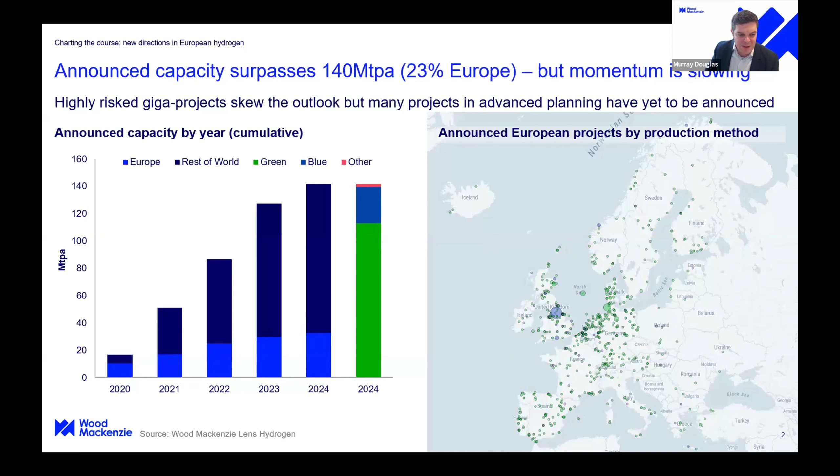What's really been catching the headlines this year is the number of project cancellations we're seeing. I think to some extent there's not a huge surprise here that we are seeing projects cancelled. We saw a lot of early announcements coming through, so there was always an expectation that we'd begin to see some attrition from that.

Obviously, what's more worrying is that some of those particular projects that have been cancelled—the classic example is the Ørsted FlagshipONE project, which had taken a final investment decision and was subsequently cancelled for a variety of reasons, but we think principally because they had not secured an off-taker.

And we're beginning to see more project cancellations come through. We think we'll continue to see that next year. Again, maybe a more bearish sentiment for European markets is that of the 2.5 million tons per annum globally that we've seen cancelled, almost half of that has come out of the European market. So we are seeing clear evidence of projects struggling in the European market, and it's down to a number of different reasons.

Some of those are as simple as portfolio streamlining within companies, where they announced a range of projects and they're simply narrowing down and focusing on the strongest opportunities. This is natural and evident across most parts of the energy value chain as well—it's not a particular problem for hydrogen.

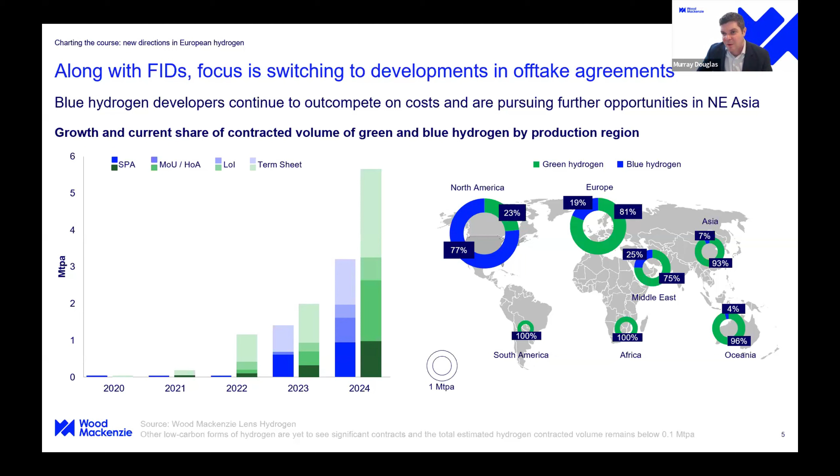But I think also when we look at this on a regional basis on the right-hand side, we see some quite interesting trends where we have generally a heavier weighting towards green electrolytic hydrogen within most markets, with the exception of North America. And actually, one of the things that we're expecting, particularly under the new Trump administration, is we'll probably see that share of blue offtake agreements out of the North American markets continue to build and even maybe grow further over the next few years.

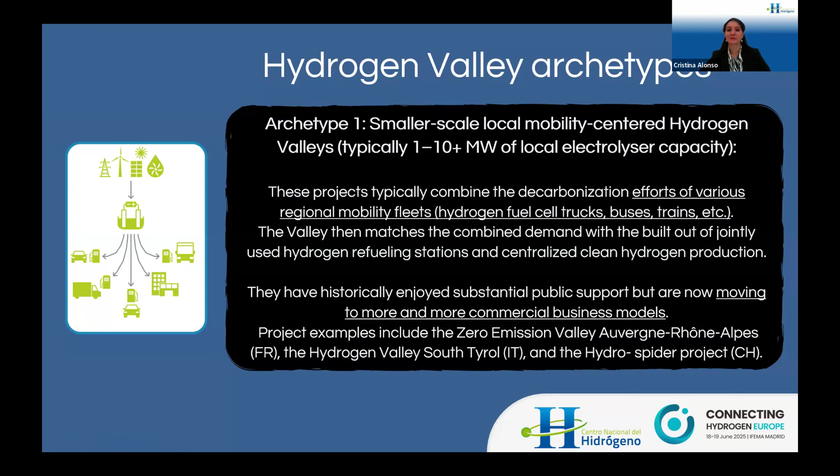So the first archetype is the small scale, local mobility centered hydrogen valleys, typically from 1 up to 10 megawatts of local electrolysis capacity. This project typically combines the decarbonization effort of various regional mobility fleets. The valley then matches the combined demand with the build out of jointly used hydrogen refueling stations and centralized clean hydrogen production. These have historically enjoyed substantial public support, but are now moving more and more to commercial business models.

Archetype 2 is the medium-scale hydrogen valley focusing on industrial decarbonization, typically from 10 to 300 megawatts of local electrolysis capacity. These valleys are based on a local or regional hydrogen production source, usually clean hydrogen, directly at the site of one or more large industrial consumers serving as anchor load, such as refineries or fertilizer production plants. The key to success for such projects is a seamless integration of the hydrogen production into the established production processes of the anchor off-taker. This type of hydrogen valley continues to grow in numbers and production sizes.

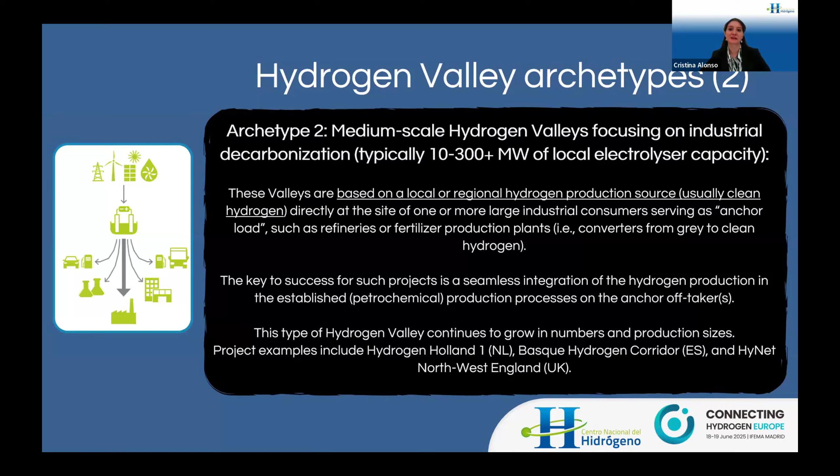Archetype 3 is the large-scale and ultimately export-oriented hydrogen valley, typically 250 up to 1,000 megawatts of local electrolysis capacity. This type of valley is characterized by focusing on low-cost production of clean hydrogen for local offtake, but ultimately mainly regional and international export to connect supply and demand centers on a global scale.

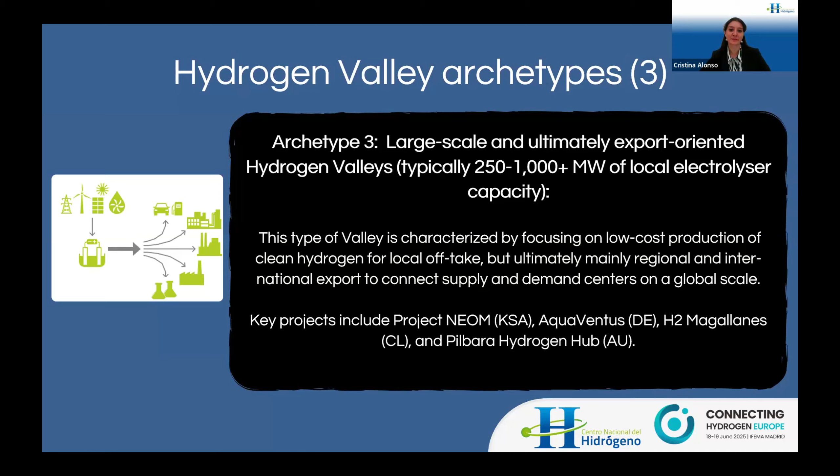According to the European Commission, the hydrogen valleys division is the large-scale hydrogen valleys, more than 4,000 tons per year of hydrogen produced and used, and the small-scale valleys, more than 500 tons per year of hydrogen produced and used.

Recent cost increases and limited commitments so far for potential off-taking reduce the speed. Spain's ambition of 11 gigawatts of installed electrolysis capacity by 2030 could translate into the annual production of around 1.1 megatons of green hydrogen, requiring a total investment of about 20,000 million euros for electrolysis alone, with additional investment required for renewable energy.

Green hydrogen could be produced for 4 to 5.5 euros per kilo in Spain by 2030, around 10 to 20% below the projected production costs in Central Europe, thanks to power purchase agreement markets, the lower cost of electricity, which is key to cost-competitive hydrogen production, as well as a well-established industrial and transport footprint with the potential to drive new hydrogen and synthetic fuel demands.

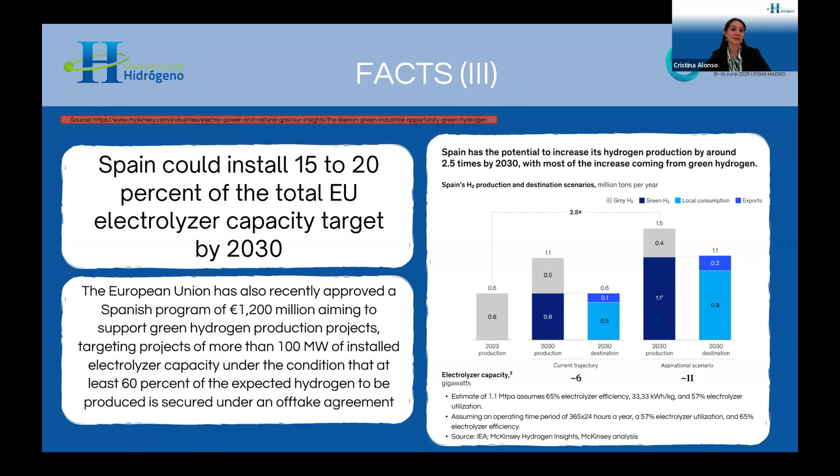Spain, together with Portugal, is the fifth largest emitter of biogenic CO2 in the European Union. Spain has the potential to retrofit its existing network of gas pipelines for the transportation of green hydrogen, both for domestic consumption and for export. Spain enjoys an advantageous geographical position relative to maritime trading routes, and could install 15 to 20% of the total European electrolysis capacity target by 2030.

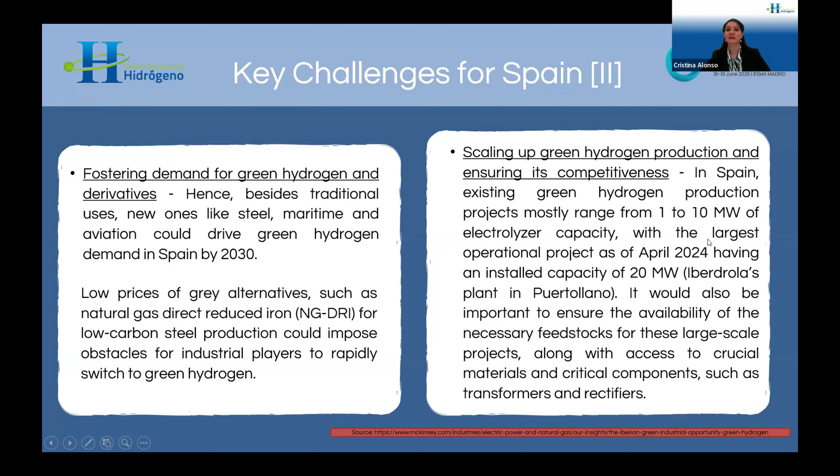Some key challenges for Spain: the European Union and Spain must continue to ensure that regulatory demand for green hydrogen is met, financing first-of-a-kind green hydrogen projects and making them bankable, deploying and optimizing the infrastructure to develop green hydrogen production, transport and storage, fostering demand of green hydrogen and derivatives, scaling up green hydrogen production, and ensuring its competitiveness. Spain produced approximately 0.80 million tons of hydrogen in 2022, representing around 10% of the European Union's total production.

Most of Spain's current hydrogen production is grey hydrogen. However, efforts are underway to expand green hydrogen production through renewable energy projects. The Spanish government launched a support scheme for hydrogen valleys, 1.2 billion euros to support industrial-scale projects based on a set of criteria, including prior commitment from customers to purchase 60% of hydrogen production.

Hydrogen must be renewable as per European guidelines. For electrolysis, capacity must be more than 100 megawatts, with an exception for grouping of projects with at least 50 megawatts electrolysis capacity. Several production projects utilizing a cluster approach are already underway in Spain, such as Fertiberia's renewable hydrogen, ammonia and fertilizer production project here in Puertollano.

Now let's make a quick tour through some of the hydrogen valleys in Spain. The Basque Hydrogen Corridor, led by developer Petronor, has the objective of creating a hydrogen ecosystem in the Basque Country which allows progress in the decarbonization of energy, mobility, different industrial sectors, as well as services sectors, and is based on specific projects and actions building on a strategy of public-private collaboration. In addition, the Basque Hydrogen Corridor aims to be a key enabler of sustainable development of the hydrogen energy value chain in the region. The value chain coverage includes hydrogen production route, hydrogen end uses, hydrogen storage conversion, hydrogen transport and distribution.

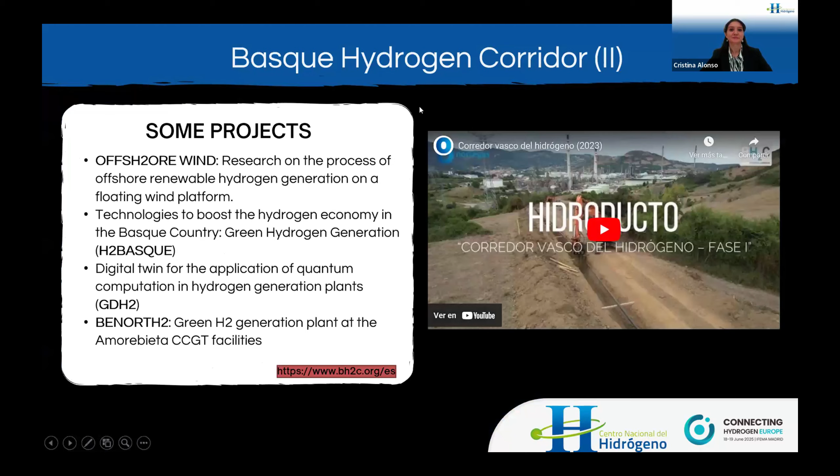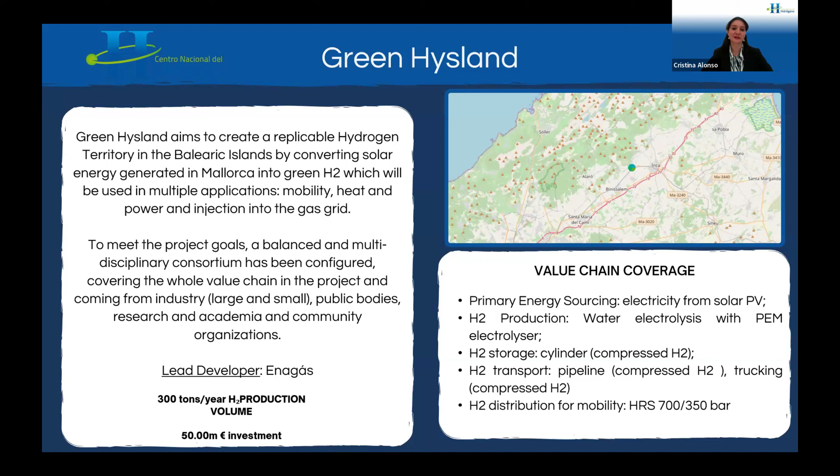Green Hysland aims to create a replicable hydrogen territory in the Balearic Islands by converting solar energy generated in Mallorca into green hydrogen, which will be used in multiple applications: mobility, heat and power, and injection into the gas grid. To meet the project goals and balance, a multidisciplinary consortium has been configured, covering the whole value chain in the project, coming from industry, large and small public bodies, research and academy, and community organizations. The lead developer is Enagás, and the value chain covers primary energy sourcing, hydrogen production, hydrogen storage, hydrogen transport, hydrogen distribution for mobility.

Moeve's project, Andalusian Green Hydrogen Valley, will install 2 GW of electrolysis capacity in Huelva. The Onuba project is an agreement with Fertiberia to produce 400 MW of renewable hydrogen and ammonia with a direct power supply agreement, and an agreement with C2X to produce 200 MW of renewable hydrogen and renewable methanol. In Algeciras, they will produce renewable hydrogen with EDP and renewable ammonia with Yara to decarbonize industries and the maritime sector, also in Central Europe.

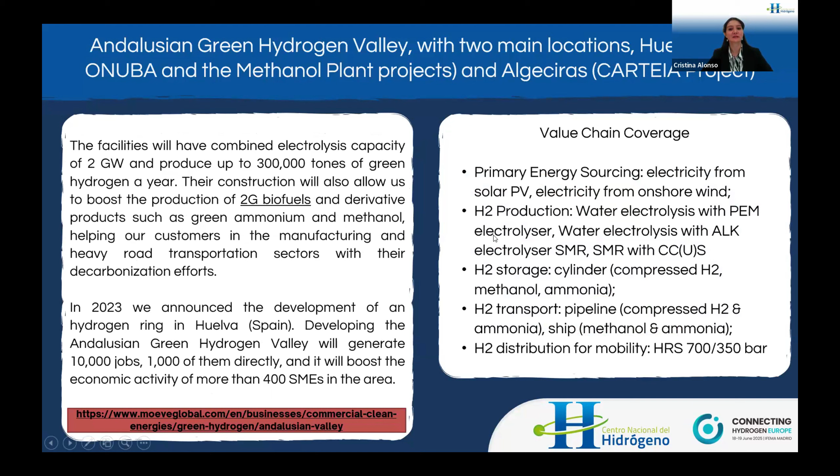The value chain covers primary energy sources, hydrogen production, hydrogen storage, hydrogen transport, hydrogen distribution for mobility. The Valencian Hydrogen Cluster, HyVal, is an initiative led by BP, created with the aim of promoting and favoring the development of the renewable hydrogen economy in the Valencian community and contributing to the region's energy transition through public-private collaboration. HyVal includes large-scale green hydrogen production at BP's Castellón refinery of up to 2 GW of electrolysis capacity by 2030 in two phases.

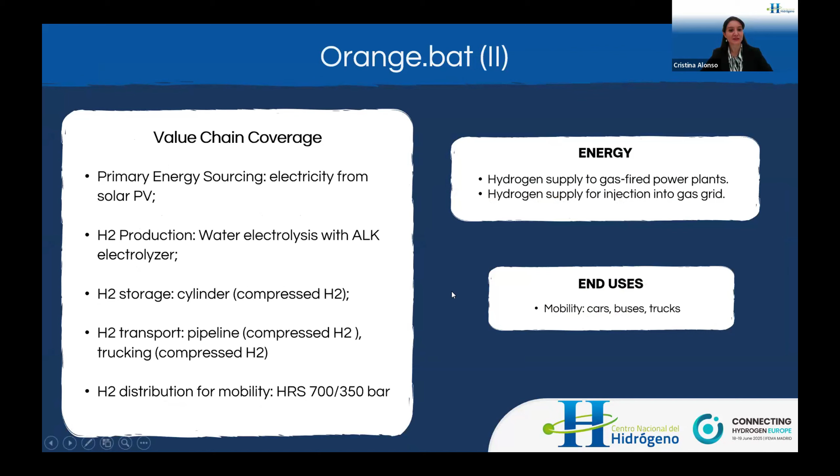Orange Bat consists of an electrolysis plant of 100 MW to produce green hydrogen in the municipality of Onda, Valencia, under hydrogen purchase agreements to industrial off-takers, the ceramic cluster, and for mobility. The hydrogen will be distributed through a new hydrogen grid. The green electricity required will be provided by PPAs from renewable energy plants. They partner with leading technology players in the hydrogen industry and other European Union equipment suppliers. The lead developer is Smart Energy. The value chain covers primary energy sourcing, hydrogen production, hydrogen storage, hydrogen transportation, and hydrogen distribution for mobility.

To conclude, I would like to highlight that the European Union continues to support hydrogen production through the first European-wide renewable hydrogen auction signs grant agreements, with 6 new projects, 2 of them here in Spain, Hysencia and Catalina, where CNH2 will participate. Thank you very much for your attention.

Thank you for sharing your important information with us, Cristina. I have also gathered some questions for you. The first one is, how is Spain Hydrogen Valley planning to drive the commercialization of hydrogen? And what specific end users or applications are being prioritized for adoption?

Spain is leveraging its hydrogen valleys, including key projects like those in Aragon, Castilla-La Mancha, and Catalonia, to drive the commercialization of green hydrogen. These initiatives are part of the European push to develop hydrogen technologies under the European Hydrogen Strategy, which aims to achieve climate neutrality by 2050. Spain's approach focuses on several key strategies: industries and applications, priority end users, and hydrogen valleys as pilots.

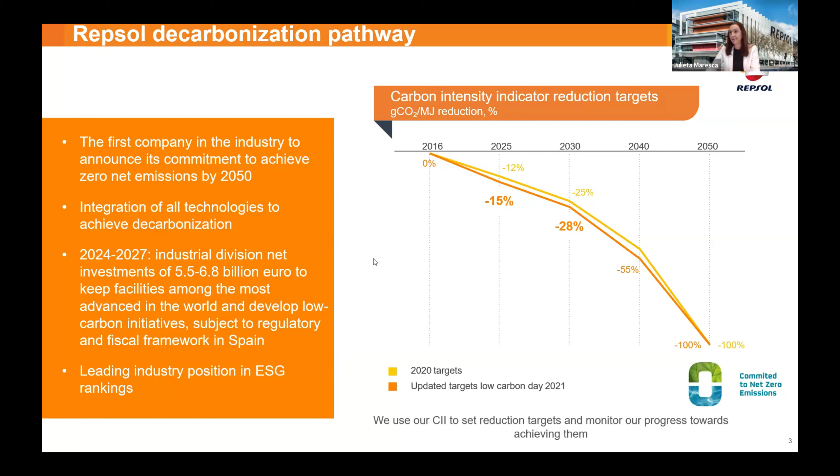Repsol produces energy from different sources, including hydrocarbon and renewable energy such as wind, floating wind, solar, and hydroelectric, and transforms it into products and services for our customers. Repsol has 4 main business lines that enable it to move forward in the energy transition: upstream, industrial, customers, and low carbon generation.

I want to share with you some big numbers regarding our footprint and capability. Our industrial operations are robust, and we have implemented over 650 digital transformation initiatives and established the Repsol Tech Lab, which boasts over 200 research alliances worldwide. Repsol is also a leader in renewable energy, with around 3 gigawatts of low carbon generation capacity in Spain, the USA, Chile, Italy, and Portugal.

Going back to the industrial area, we are transforming our industrial facilities into multi-energy hubs, capable of turning a wide variety of raw material and waste into products with a low carbon footprint, such as 100% renewable fuels. Where do we do it? In our 7 industrial complexes, 6 on the Iberia Peninsula and 1 in Peru. The company is proud to have one of Europe's most efficient refining systems, capable of processing over 1 million barrels of crude per day.

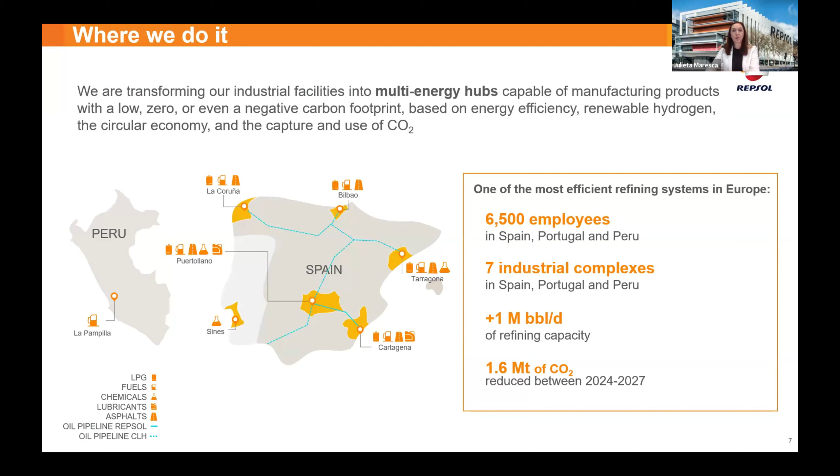Our industrial strategic line 24 to 27 aims to increase the profitability and create hubs for renewable fuels. We will advance in turning our industrial complexes into low carbon platforms, becoming leaders in renewable fuels in Iberia, and explore opportunities to grow our renewable fuel businesses in more attractive markets like the USA.

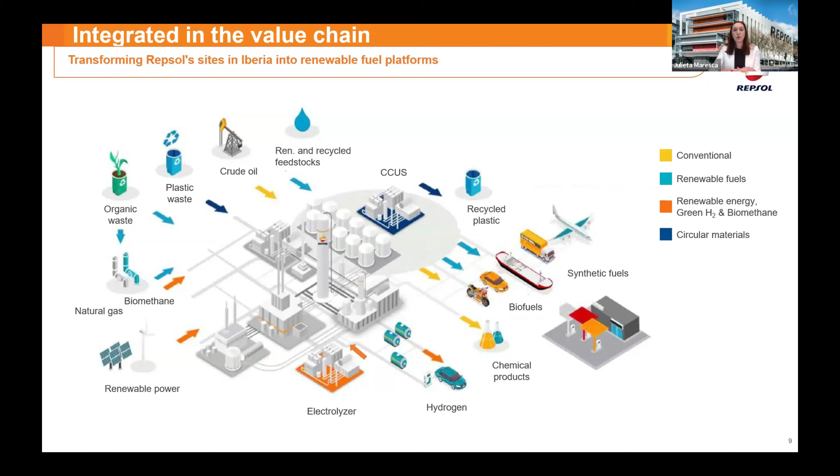We are transforming our legacy sites. In the value chain, we have made conventional and renewable fuels and biomethane from organics and plastic waste, feedstock, circular material, and now we are incorporating also renewable hydrogen.

I want to highlight Repsol's commitment to innovation and technology throughout our Repsol Deep Tech Fund. This fund is endowed with 50 million euros for investment in startups, and we have already invested in 20 startups with disruptive technologies. We have over 230 experts working in various fields such as advanced mobility, bioenergy, advanced mathematics, geophysics, low emission, and of course, renewable hydrogen.

Our Repsol Technology Lab is a hub of innovation. Repsol has a strong ambition to remain leader in hydrogen in the Iberia Peninsula. Our goal aligns with the goals stated in REPowerEU, which plans to produce 10 million tons of renewable hydrogen and import another 10 million tons within the EU by 2030.

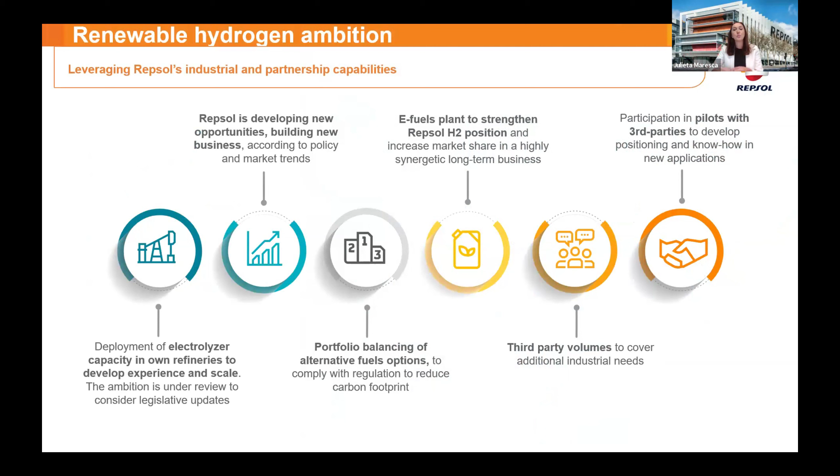Our renewable hydrogen is a fundamental lever in our decarbonization strategy. We are planning to install electrolyzer capacity in our refineries to gain practical experience and achieve scalability, and aim to leverage Repsol's industrial experience and partnership capabilities to maximize our strengths.

Repsol will leverage its own platform as the first hydrogen producer and consumer in Spain, and its presence along the value chain: renewable generation, hydrogen production, and commercialization. Our plan is not restricted to our own consumption, it needs to include growing our leadership in hydrogen production to meet the demand of other clients, such as industrial consumers like fertilizers, steel, and chemicals in clusters near our industrial sites, which we will reach with short-distance logistics.

Heat uses, initially blending hydrogen with natural gas in the Spanish natural gas network, and serving emerging needs of hydrogen and e-fuel in transport.

Our vision for hydrogen deployment is both strategic and feasible. We are aiming to install up to 0.7 gigawatts of hydrogen capacity by 2027 and up to 2.4 gigawatts by 2030, including our international position and renewable hydrogen generation from biomethane. Targets and capex could be adapted according to opportunities driven by regulation and market development.

Here you can see the Repsol Hydrogen Hub development in phase 1 until 2027. There are ongoing big projects across Iberia with a multi-production technology approach. Some of them, for example, Tarragona 150 megawatts, Cartagena, Bilbao, the big ones of 100 megawatts, Puertollano and La Coruña 30 megawatts, and in Sines, Portugal, we have a project with 4 megawatts of electrolyzer. For all these projects, we are planning operations in 2025, 2026, and 2027, depending on the regulation and tax scenario.

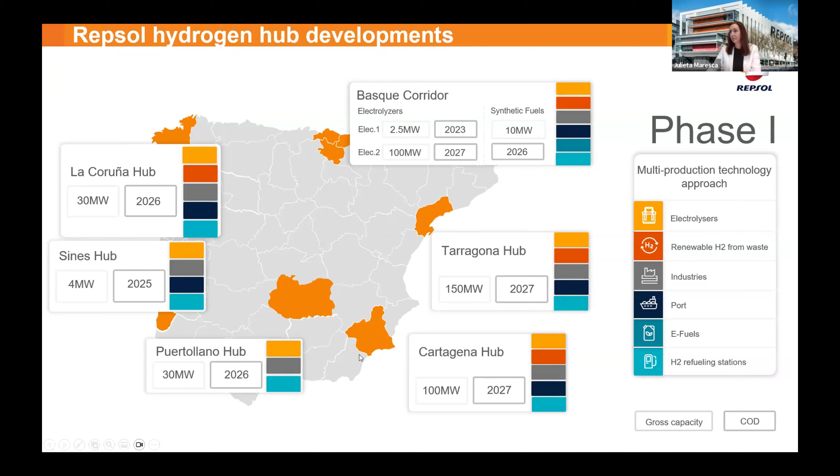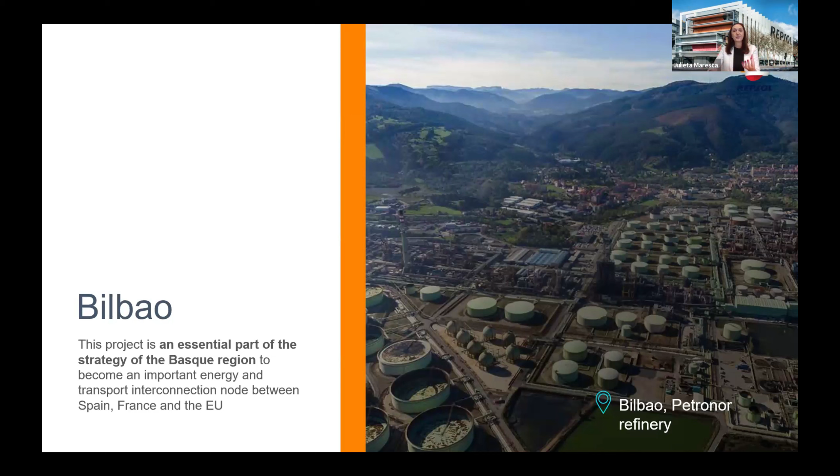Here you can see the Repsol Hydrogen Hub development in phase 1, in Bilbao. Here are some cases I want to show you. The Bilbao project is a key part of the Basque region strategy to become a significant energy and transport connection hub between Spain, France, and the European Union.

In this site, we have 3 electrolyzers. The first of 2.5 megawatts is in operation from last year with an annual production capacity of 350 tons annually of renewable hydrogen for industrial and mobility uses. The second one of 10 megawatts, with our partner Saudi Aramco, will produce hydrogen for the refinery and for an e-fuel plant, which will also use captured CO2.

And the biggest, 100 megawatts, to use the product not only for the refinery, but also for injection into the natural gas network. Its planned operation is in 2027, and this project has been identified by the European Commission as a project of common European interest.

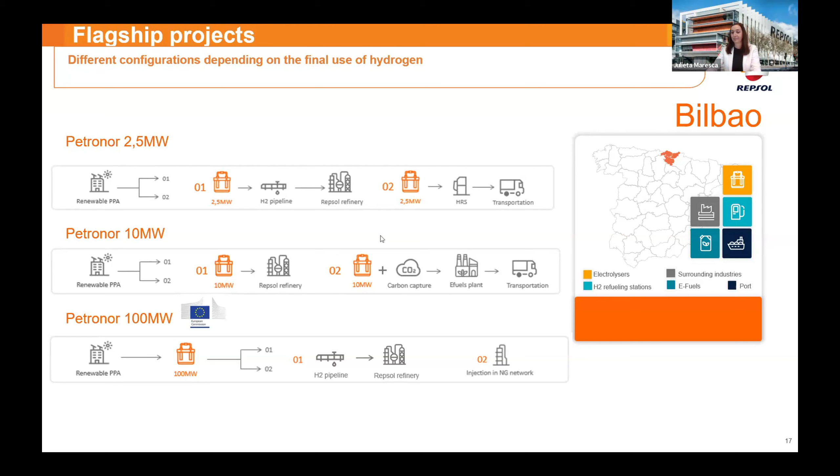We aim to produce renewable hydrogen and oxygen in the Cartagena refinery in the Escombrera Valley. We are at the front-end engineering design stage, and the FID should be in 2025, next year. Like the Petronor project, this project is also identified by the European Commission as a project of common European interest.

As Cristina said before, it's also important to mention that Repsol leads and promotes hydrogen valleys in Spain, such as the Basque Hydrogen Corridor, the Hydrogen Valley of Catalonia, and the Hydrogen Valley of the region of Murcia, among others, in line with the future hydrogen backbone network.

It also participates as a promoter company in the collaborative alliance SHYNE, Spanish Hydrogen Network, created in 2022, with the mission of promoting renewable hydrogen and maximizing the entire value chain. This association has a collaborative network made up of 7 promoter companies and more than 20 collaborators.

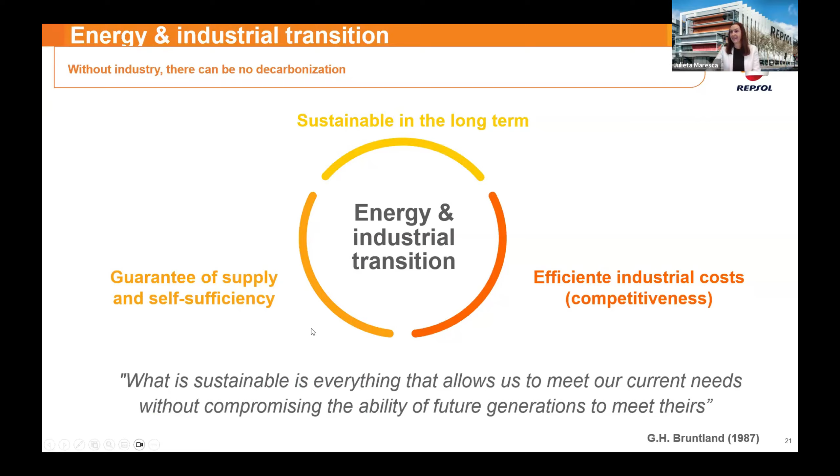To conclude, Repsol remains optimistic. The company is confident in its current renewable hydrogen portfolio, which enables it to capitalize on its diverse efforts in the unique condition of the Iberia Peninsula in terms of renewable resources and industrial synergies. The advancement of the European and Iberia Hydrogen Initiative can build upon Repsol's existing flagship projects, lowering barriers for new investments both in the peninsula and internationally.

Thank you for sharing. Thank you so much, Julieta. I've also got some interesting questions for you.

So the first one is, in your view, what are the primary challenges or barriers to scaling hydrogen adoption in the coming years? And what strategies might address these concerns effectively?

There are many challenges to expanding the use of hydrogen in the coming years regarding technology, regulation, and infrastructure, among others. But I would like to highlight three in particular. The primary concern is the high LCOH, the levelized cost of hydrogen production, influenced by the capex of electrolyzers and electricity prices, making economic viability without subsidy difficult at present. Funding from European and national sources is essential for market creation. In the case of hydrogen in particular, electrolysis technology has been known for decades, but has not yet been operated for long periods at the scale at which 100 megawatt plants are now being planned.

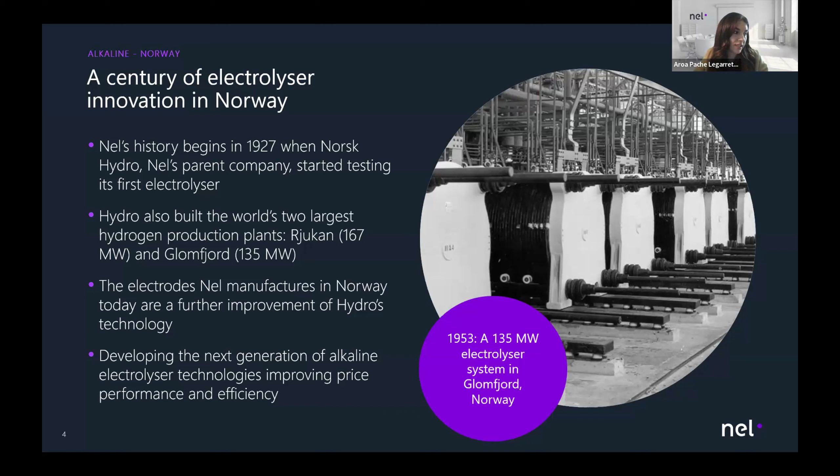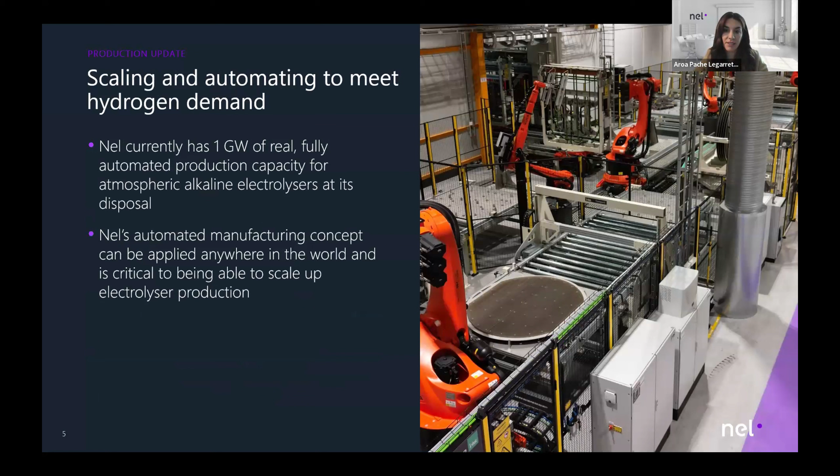The electrode manufacturer facility is in Heroya, Norway, and it has a current 1 gigawatt annual capacity, and it's fully automated, as you can see in the picture.

And then in the US, in Wallingford, Connecticut, we have another technology that has been developing and selling for 27 years now. This one started with Proton OnSite, that originally utilized PEM technology to produce oxygen for submarine life support. Now, over the last years, in collaboration with General Motors, we are developing the next generation PEM technology, which will improve price, performance and efficiency.

Indeed, last month we had the grand opening in Wallingford, Connecticut, and now the production capacity is 500 megawatts, mostly automated.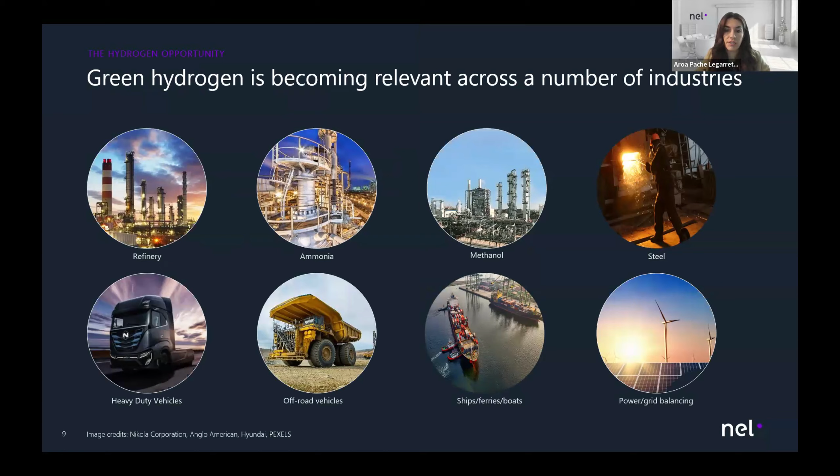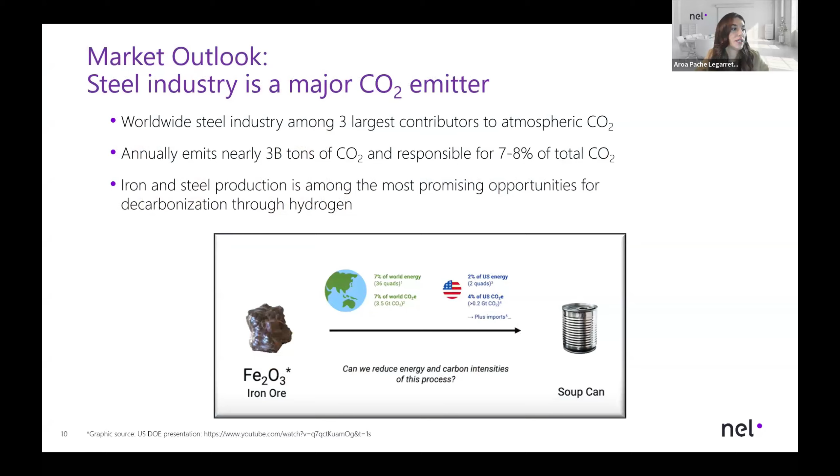So in the next one, just as an example, we have steel. Globally, the steel industry is among the 3 largest contributors to CO2, responsible for 7 to 8 percent of the total emissions. So imagine how huge an opportunity for green hydrogen this is.

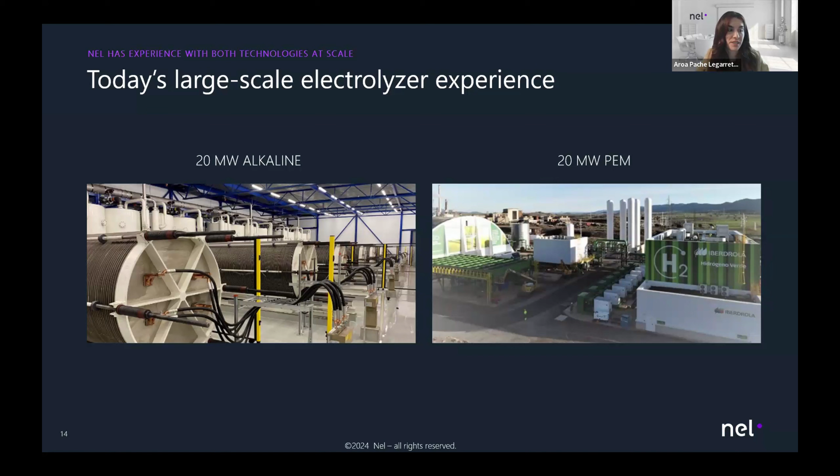For mobility applications, we have installed a number of packaged PEM electrolyzer plants, as the one that you see in the picture. This is a fully integrated solution that sizes very well for a lot of car, truck, bus fueling applications. This is just an example located in Switzerland, of 2.5 megawatt nominal power and about 1.1 metric tons per day.

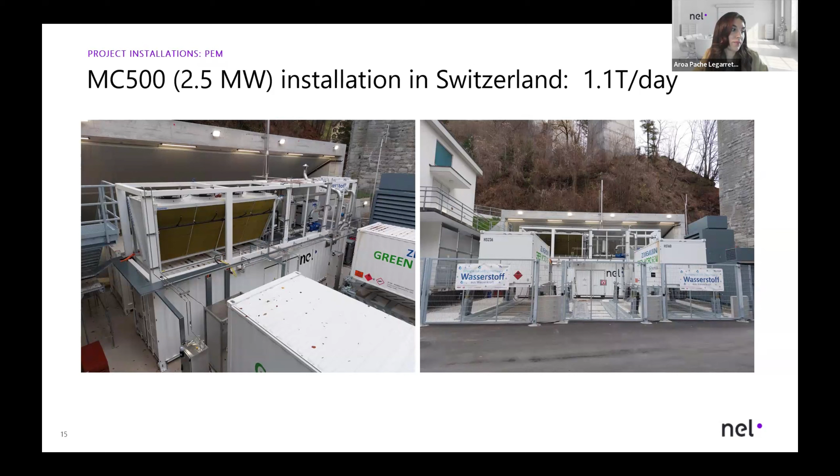We move to another example that is the famous one and the one mentioned before. It's the largest PEM electrolyzer installation installed to date, which produces 8.5 metric tons per day of hydrogen output. This is used for green ammonia production at the Fertiberia plant in Puertollano, Spain.

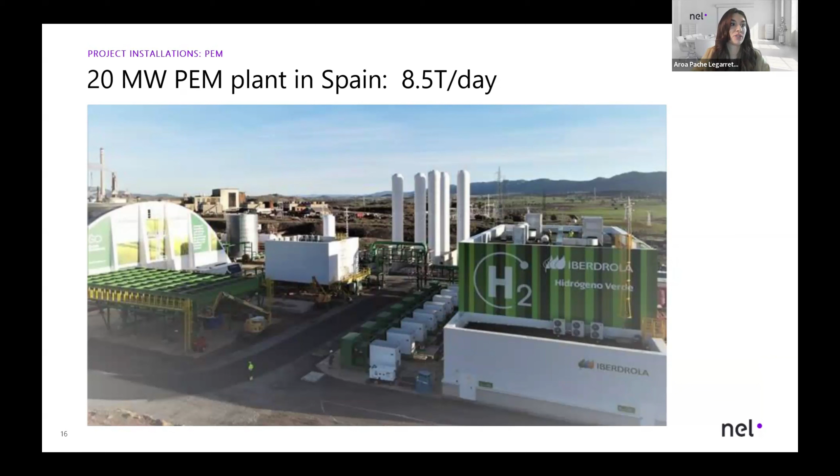Another case is Ovako in Sweden. This case is for producing green steel with 20 megawatts of alkaline electrolyzer and 8.4 metric tons of hydrogen.

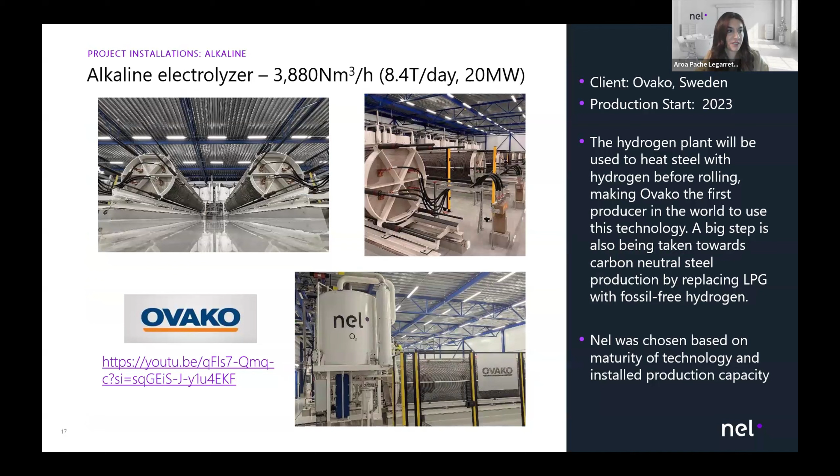And lastly, another case, this one is Everfuel. It's 20 megawatts as well, and in this case, it's for a combination of mobility and refinery decarbonization.

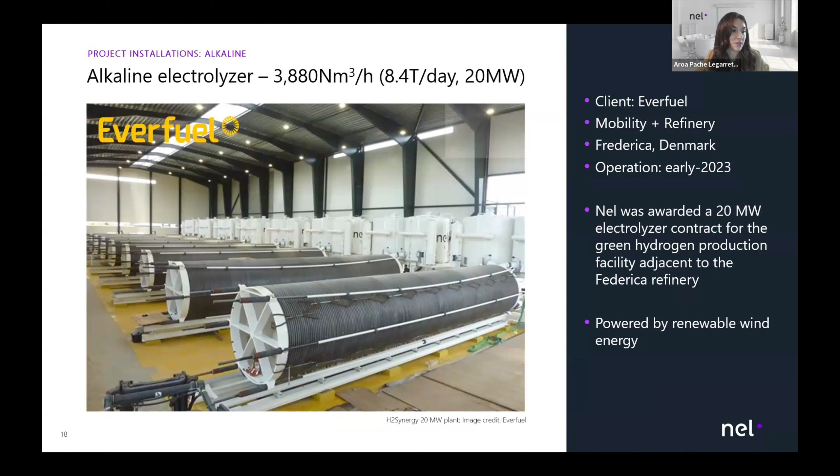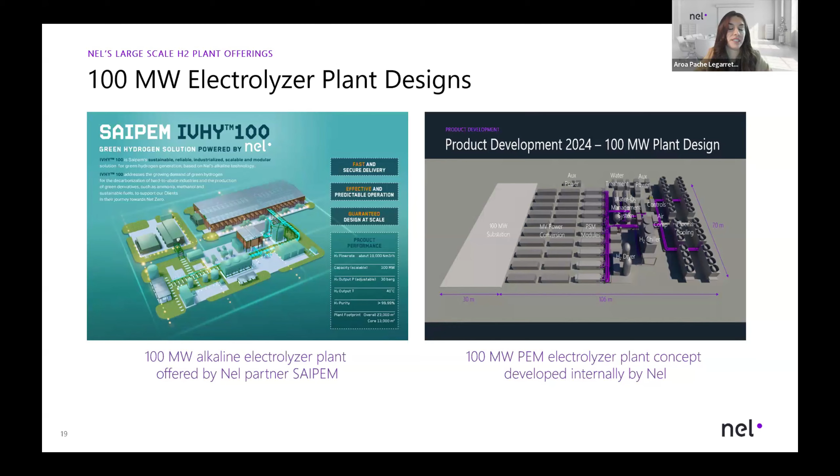A couple more slides about what we are focusing on, that is to offer the lowest cost production for both our PEM and alkaline platforms. Our next generation alkaline technology is going to be pressurized, and on the PEM side, in collaboration with GM, we will also offer improvements in efficiency and cost. On the cost side, we will be going between 40–70% CapEx reduction on our electrolyzer stack cost. These two topics are very important to us.

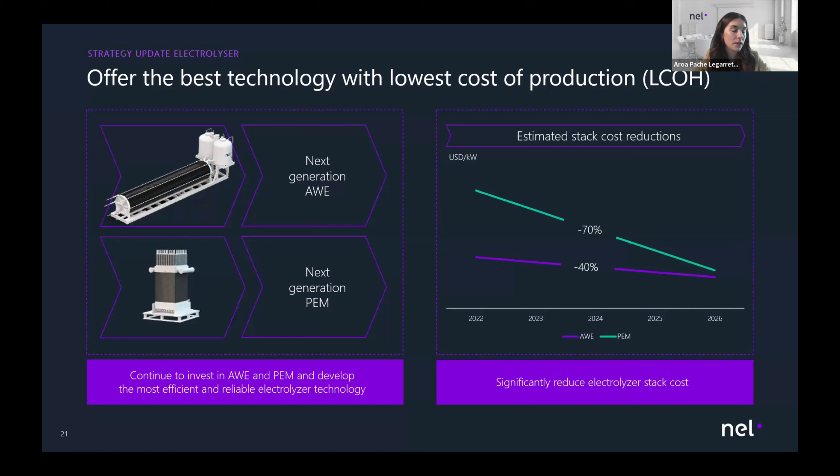This last slide shows that we are focusing on what we do best, that is our core technology. You can see in the purple rectangle, that is the stack itself and balance of stack. Because at the end, the balance of plant is something that can be done by others with the help of Nel design, as we want to get to standardized deliveries and less customization, as we think this is how we can really drive cost out of the technology.

In terms of market focus, it is on areas where demand is very high, the ones you see in purple, as well as Europe and North America. As export markets, we are focusing on Australia and Chile. And that would be all from my side.

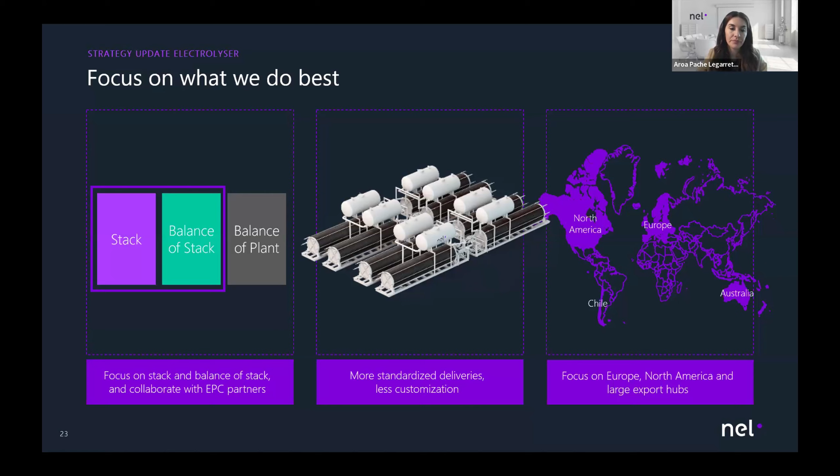Thank you, it is a brilliant presentation. There are also some questions for you. The first one is, what is your opinion of alkaline technology? What advancements and innovations can we expect in alkaline tech over the next few years?

We have both technologies, alkaline and PEM. We see alkaline technology as one of the most mature and cost-effective technologies for green hydrogen production. It is also very reliable, and it works very well for large-scale hydrogen applications. At Nel, we believe alkaline technology will remain a cornerstone of the hydrogen economy, especially for industrial applications that require robust and proven systems.

Looking ahead, the innovations we can expect in alkaline would be the pressurized alkaline as our next generation. But we are not stopping our current product lines. We also see efficiency improvements, operational flexibility, more modularity, and cost reduction in our current atmospheric line.